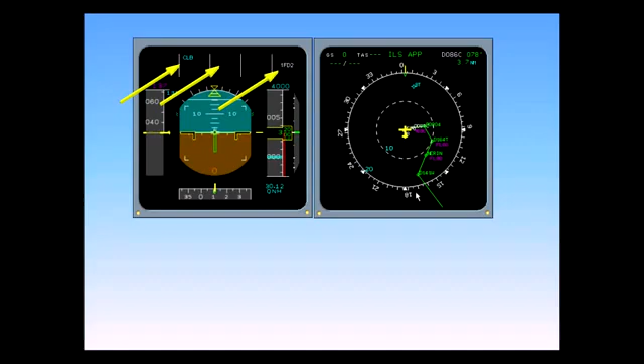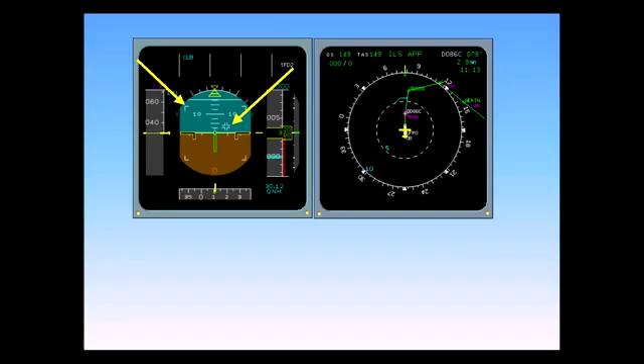Also notice the box corners toward the edges of the ADI and the Maltese cross in the center. These symbols appear after engine start and are used during the flight control check. The cross is the side stick command indicator, what the stick is commanding in pitch or roll. The box corners are stick command limits. The center of the cross should not exceed these limits when performing the flight control check.

The ground roll guidance command bar also appears after engine start, when either TOGA or FLEX is selected, provided there is an operating localizer on the takeoff runway selected in the MCDU. It replaces the FD vertical bar and is used during takeoff and rollout for assistance during low visibility. All of these symbols disappear after takeoff.

When the thrust levers are placed into the flex or toga detent, the FMAs indicate manual flex 49, meaning that the thrust has been manually placed into the flex detent, and that thrust for the assumed temperature of 49 degrees Celsius has been calculated and set.

Speed select 197 in blue, meaning that a speed other than the default econ speed has been selected.

A/THR illuminates in blue, meaning that the auto thrust system is automatically armed. It will engage automatically when thrust is reduced to climb.

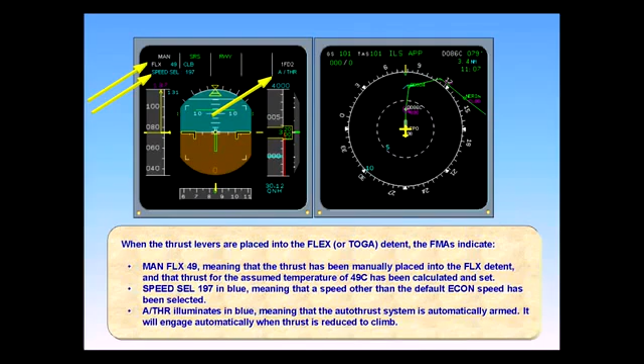The FMA also shows SRS as the vertical engaged mode. SRS, Speed Reference System, commands the horizontal flight director bar to a pitch angle resulting in a speed of V2 plus 10 knots. Should an engine fail, SRS will command a speed of V2 or existing aircraft speed, whichever is higher.

RWY, meaning runway track, is the engaged lateral mode. Runway track is selected by simply turning the heading knob one click in either direction while the aircraft is on the ground. The heading knob must not be pushed or pulled. Runway track can be used up to 400 feet AGL to ensure obstacle clearance during initial climb in case of engine failure.

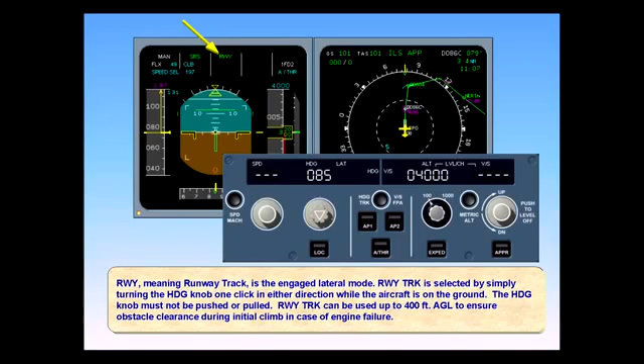At 30 feet, runway turns to runway track. This mode provides lateral guidance on the extended runway centerline based on the track memorized during the takeoff roll.

The autopilot may be turned on at 100 feet AGL, provided SRS has engaged. If it has not, the autopilot may not be used until 500 feet AGL.

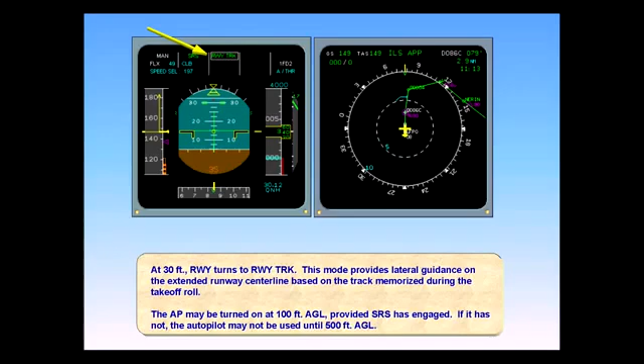At 400 feet AGL, the aircraft must be put into the heading mode. This is accomplished by pulling the heading knob on the flight control unit.

At the UAL thrust reduction acceleration altitude of 800 feet AGL, a white flashing message, lever climb, appears in the auto thrust FMA. The FMA flashes as a reminder to set the thrust levers to the climb detent. Set the thrust levers to climb.

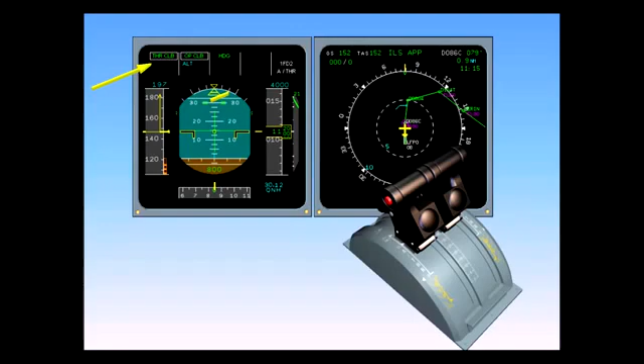Thrust climb illuminates in green in the auto thrust FMA column, and auto thrust turns white in the engaged status column. The auto throttles have automatically engaged. The system is in the thrust mode and commands max climb thrust.

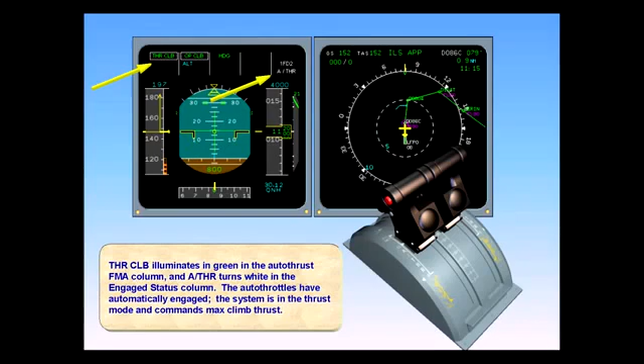Also at 800 feet, SRS has disengaged and the vertical mode now becomes open climb. Since we had changed the Econ climb speed to green dot, the FMGC treats this speed as a selected speed. The magenta triangle indicating managed speed disappears and is replaced by the blue selected speed indications. Since 197 knots is off the speed scale, a blue number appears on top of the speed tape. Also, ALT is displayed in blue, indicating that the altitude capture mode is armed.

The aircraft now begins to accelerate to green dot speed. 60% of the power is used to increase speed and 40% to maintain climb. Flaps and slats are retracted on schedule. Note, the selected speed number has disappeared and has been replaced by the blue triangle.

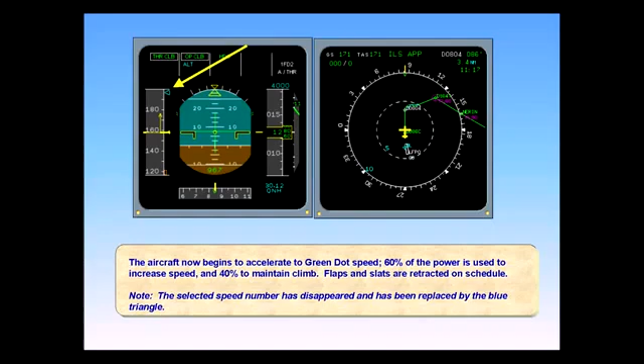At 3,000 feet AGL, the aircraft is returned to the managed speed mode by pushing in on the speed knob. Push in on the speed knob.

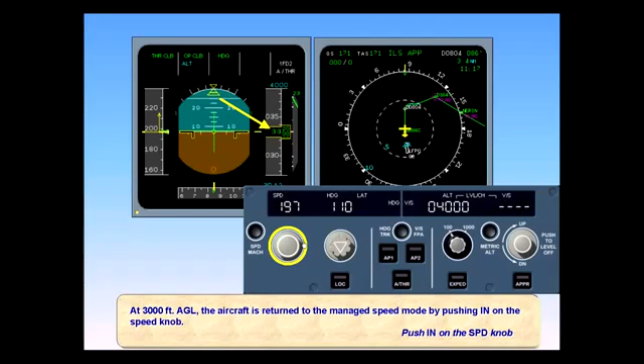The aircraft is now in the managed speed mode. Managed speed indications appear on the speed tape. Since 250 knots is above the speed tape range, the indication is shown by a magenta number above the speed tape. Also note that the flight control unit's speed window has closed, the numbers being replaced with dashes, and the managed speed light is on.

The following illustration, while not yet part of United's operating procedure, is an illustration of the capabilities of the A320. While there are plans to incorporate procedures like these into the manual, at the present time the most restrictive altitude must always be set on the flight control unit.

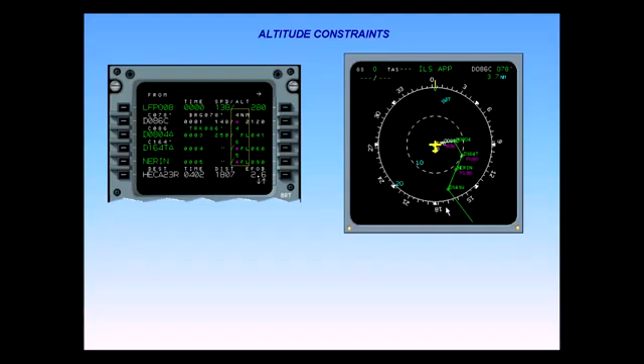The flight plan contains a SID which was loaded into the FMGC during initial setup. The SID has an altitude restriction of 8,000 feet, as indicated by the magenta dot on the MCDU.

Pressing the Constraint button on the EFIS control panel will display the restriction on the ND, whether it be a speed, altitude, or time restriction. Press the CSTR, Constraint button.

The Constraint button illuminates green, and the altitude constraint of 8,000 feet, which already is shown on the MCDU, is now visible on the ND.

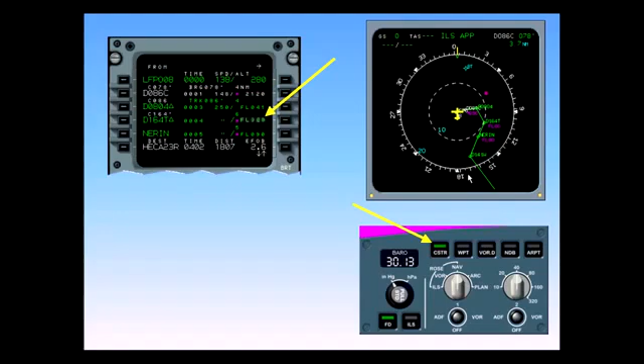We are airborne and level at 4,000 feet. ATC clears us to flight level 230, with the restriction to cross the intersection at or below 8,000 feet.

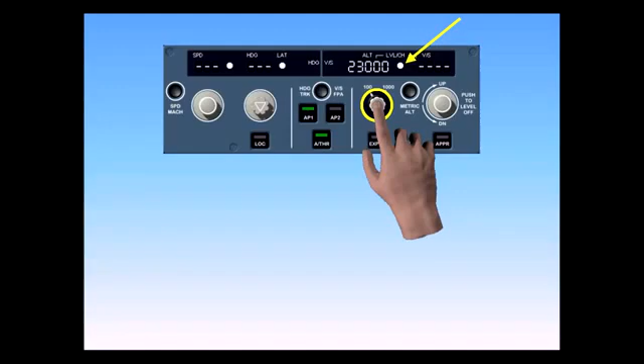First, we dial in the cleared altitude of flight level 230. Then we command a VNAV climb by pushing in on the altitude knob. The level change light illuminates, indicating that the FMGC is in vertical nav, or VNAV.

On the PFD, the primary indication that VNAV is engaged is climb, CLB, annunciated in green in the vertical column.

The FMGS has predicted that it will reach the VNAV constraint altitude of 8,000 feet before reaching the intersection. This is indicated by the magenta level point arrow. On the PFD, the ALT in magenta on the FMA and the target altitude 8,000 in magenta on the altitude scale indicate that the FMGC will level off and capture this restrictive altitude constraint.

The aircraft is now approaching the altitude constraint. The altitude constraint mode automatically engages as indicated by the FMA. On the altimeter, the magenta target altitude indicator is moving downward.

The aircraft is now level at the constraint altitude, with altitude constraint in green on the FMA. VNAV is still armed, as shown by the blue climb on the FMA. It will automatically re-engage when the aircraft flies over the constraint waypoint. The re-engagement point is marked by the blue start of climb arrow on the ND.

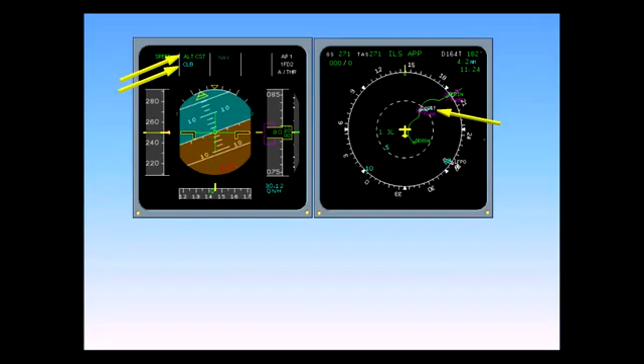You now receive a clearance to cross NERIN intersection at flight level 230. Then climb to and maintain flight level 350.

After entering the constraint into the FMGC, the system predicts reaching flight level 230 before crossing the waypoint, as indicated by the magenta level arrow. The system automatically reverts to the thrust climb mode, and the new constraint becomes the target, ALT and 23,000 in magenta.

ATC now clears you to maintain a heading of 200. Pull the heading knob to engage the heading mode.

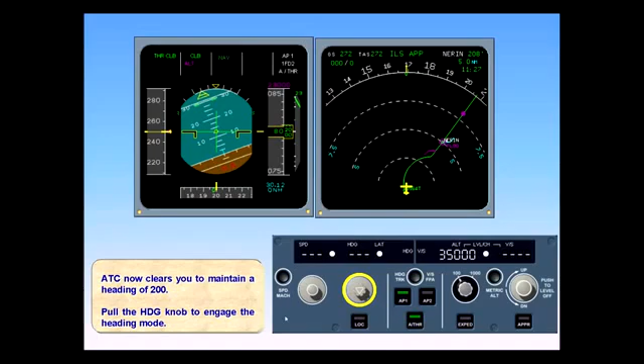On the FMAs, climb is replaced by open climb, and the magenta altitude has been replaced by blue altitude in the vertical column, and heading has replaced nav in the lateral column.

On the ND, the solid green line now indicates the aircraft track line, and the dotted green line is now the FMGS flight plan.

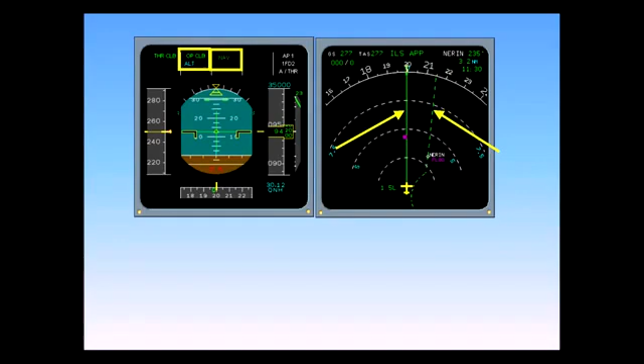On the FCU, the LAT indicator light extinguishes, the window opens, dashes disappear, and the present aircraft heading appears in the window.

When the heading mode was engaged, VNAV automatically disengaged and the FMGC automatically reverted to open climb mode. ALT magenta reverted to ALT blue, and the magenta 23,000 changed to blue 35,000. Altitude capture is now armed to the FCU set altitude, not the lower constraint altitude.

When not on the assigned route, the altitude constraints which are assigned to flight plan waypoints must be disregarded. The cardinal rule to remember is LNAV must be engaged for VNAV to operate.

You have now been cleared to a heading of 180 to intercept course and resume normal navigation. Since the intercept point is on this side of the waypoint, the aircraft will smoothly intercept. Rearm LNAV.

Nav is now armed on the lateral FMA, blue. On the FCU, a white dot in the heading window indicates that Managed Nav is armed.

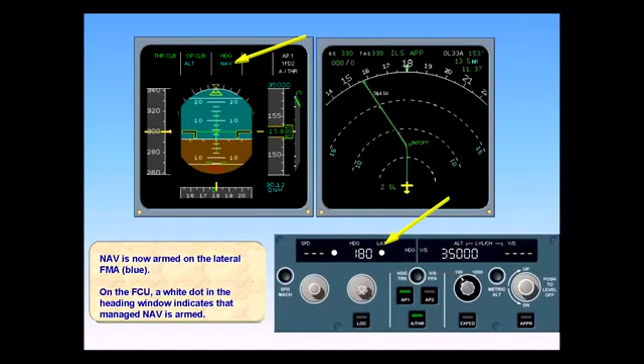On the ND, the solid green line indicates the track line to the computed intercept point, and then the remainder of the flight plan. If the intercept segment is missing, then the track line is crossing the flight plan beyond the waypoint, and interception is not possible without further action.

When the aircraft closes with the intercept point, the nav mode automatically engages, as seen by the indications on the FCU and on the FMA. VNAV is available again, but since there are no more constraints, it is not necessary to re-engage it. Climb and open climb will now perform the same function.

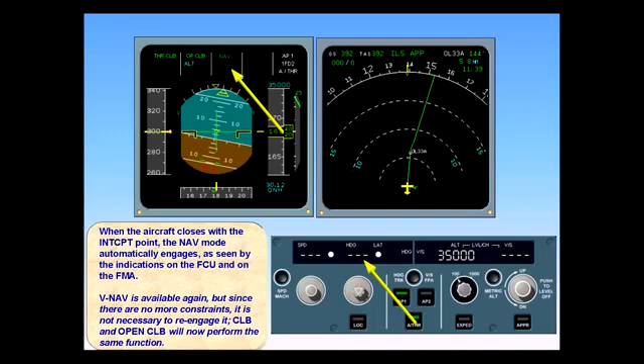Passing through the transition altitude, a yellow flashing STD message appears below the altimeter. The FMGC does not know 29.92 as anything but a QNH barometric setting. Therefore, the barometric set knob on the EFIS control panel must be pulled to set standard, STD.

Pull the baro set knob. The symbol STD now displaces the baro setting. The altitude annunciation on top of the altimeter is changed to a flight level reading. Lastly, the window in the EFIS control panel now reads STD.

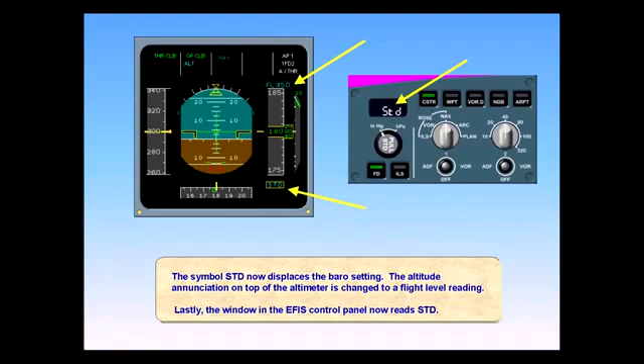You are re-cleared to flight level 290, and now ATC advises that 290 is your final. Since it cannot take radio calls, the FMGS assumes that you will continue the climb to flight level 350 and is therefore still in the climb phase, as shown on the MCDU performance page.

You have to change the cruise level on the MCDU progress page. Select the progress page. Changing the cruise flight level on this page will allow the system to go into the cruise phase. The cruise Mach will be adjusted to its optimum value, which will minimize fuel consumption.

The new flight level is already typed into the scratch pad. Insert the new flight level. The vertical mode has changed to altitude cruise, and the MCDU page has changed to cruise, indicating that the Autoflight system is now in cruise mode.

The aircraft has now reached the point of descent. ATC has cleared you to flight level 270. Since it is a 2,000-foot step down, you decide to descend slowly, selecting minus 1,500 feet per minute on the FCU vertical speed and pulling the knob. Auto thrust is in speed or Mach mode. The autopilot is controlled by a selected vertical speed.

In this instance, the selected vertical speed has priority over the auto thrust speed mode. This means that if too high a vertical speed is selected, the autopilot will pitch the aircraft down to track the vertical speed target. Even though the autothrust will command idle, the airspeed can increase significantly, even into the overspeed range.

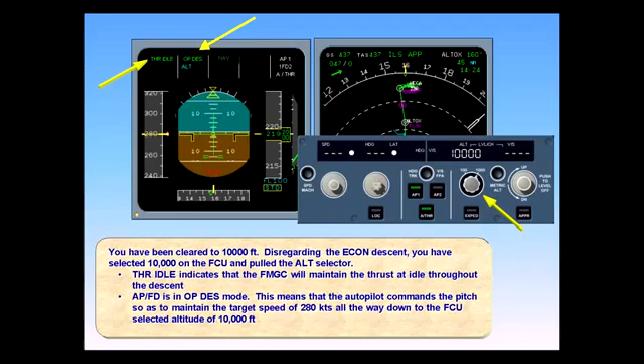As the aircraft reaches the target altitude, the speed mode automatically engages on auto thrust. Alt-star automatically engages in the vertical mode. Alt-star is the capturing mode, smoothly rounding out the level off. As soon as the aircraft is level, altitude will engage.

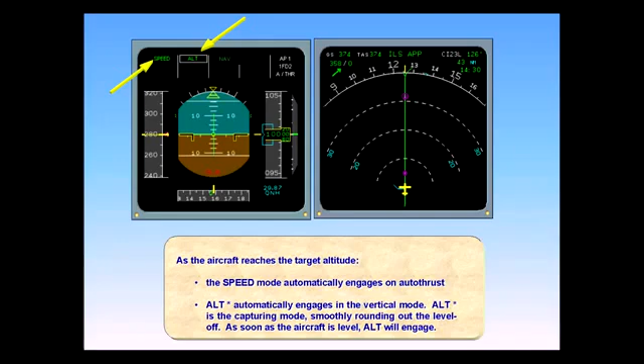We have descended to 2,000 feet and are still in the nav mode with managed speed engaged. To prepare for the approach, we need to put the system into the approach phase of flight. This is accomplished by selecting the performance key on the MCDU. It automatically displays the active phase of flight, descent. Note the prompt at line select key 6 left, activate approach phase.

Activation gives us automatic speed control if speed is in the managed mode: green dot if clean, S speed if flaps 1, F speed if flaps 2 or 3, and V approach if flaps are full. If you are still some distance from the airport and wish to activate, the use of selected speed is recommended to prevent being 40 miles out at green dot.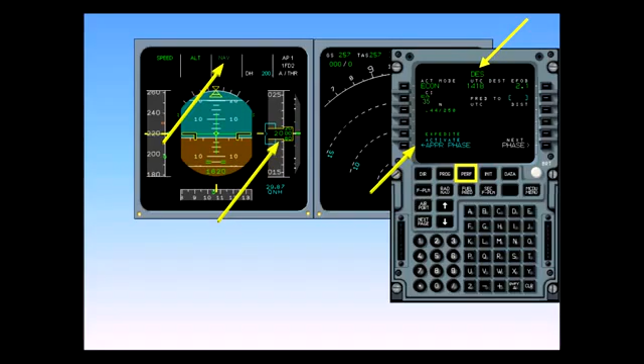Note the deceleration point on the ND. The aircraft should already be in the approach phase and should have been slowed and configured for the airport traffic pattern. If it is not, activation will automatically occur when crossing the deceleration point below 7,200 feet AGL in a managed nav mode.

If the aircraft overflies the deceleration point with managed speed engaged, the aircraft will automatically begin slowing to a speed appropriate to the aircraft configuration. Even if you are in selected speed, the approach phase will automatically activate. However, the aircraft will not slow, since a selected speed will override a managed speed.

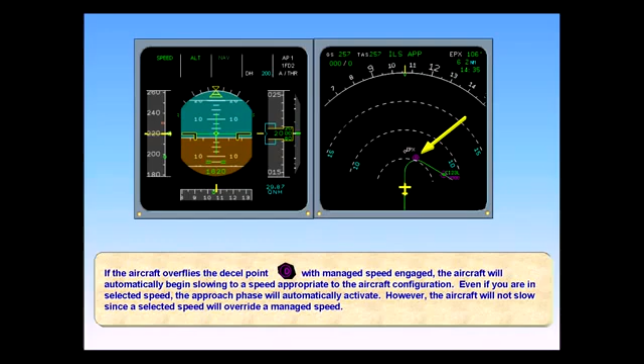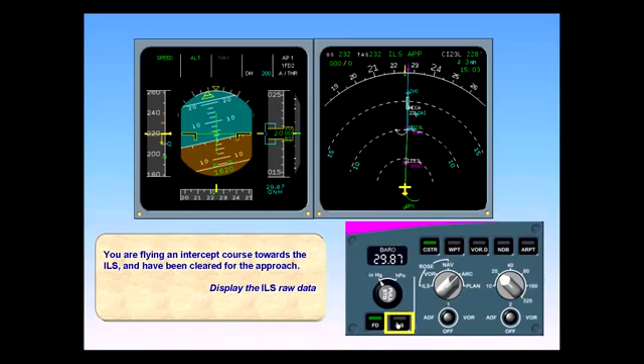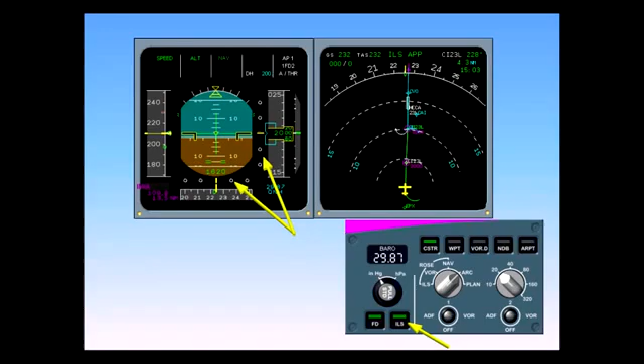You are flying an intercept course toward the ILS and have been cleared for the approach. Display the ILS raw data. The ILS switch illuminates green and the raw data ILS scales are displayed on the PFD. On the FMA, a decision height of 200 feet has previously been inserted into the MCDU performance page.

Now press the approach button to arm the approach modes, localizer and glide slope. Press the approach button. The approach button illuminates green. On the FMA, the localizer and glide slope are armed, blue. When you press the approach button, the localizer glide slope modes become armed because you have inserted an ILS approach into the flight plan.

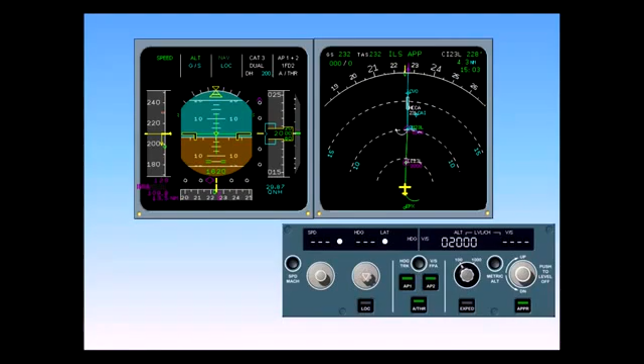To accomplish an auto-land, at least one autopilot must be engaged. For complete redundancy, the second autopilot should be engaged. Auto-land requirements will be discussed later in your training. Engage Autopilot 2. Both Autopilot 1 and Autopilot 2 are now on, and the approach capability is Cat 3 Dual. This ensures the highest possible redundancy level, and thus the lowest possible approach minima.

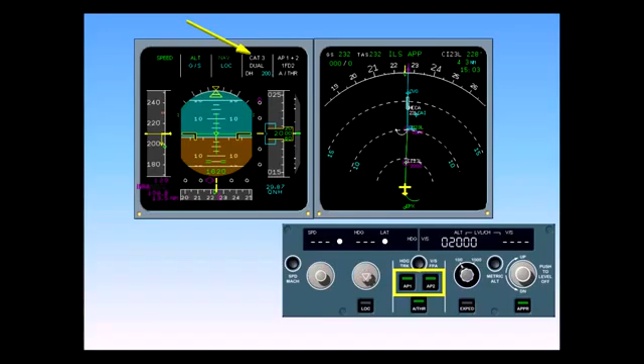The aircraft is now at green dot. Once the aircraft is 10 knots below VFE next, the amber dashes at 230 knots, the flaps can be selected to 1, and the aircraft will decelerate toward S speed. On the PFD, you can notice that the loc deviation symbol is centered, meaning that the aircraft is established on the localizer. Loc capture is indicated in green on the FMA.

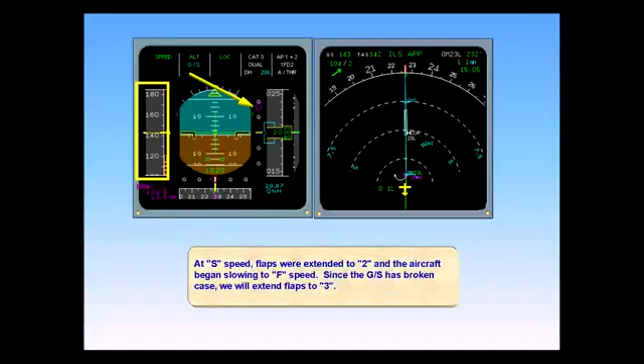At S speed, flaps were extended to 2, and the aircraft began slowing to F speed. Since the glide slope has broken, we will extend flaps to 3. The glide slope was captured at 2,000 feet with flaps 3 extended. We have successfully set the gear down, flaps full, go-around altitude on the FCU, 2,500 feet.

During the approach, as the aircraft crosses 700 feet radio altitude, ILS tuning is frozen. At this point, an FMGS change or failure does not affect the approach completion. At about 400 feet RA, the land mode engages, and any action on the FCU is disregarded. Land can be disengaged only by landing or by engaging the go-around mode.

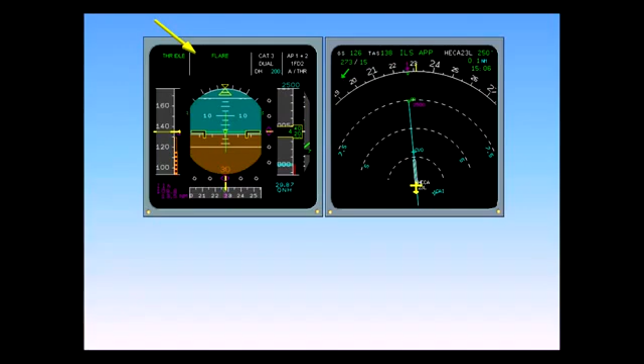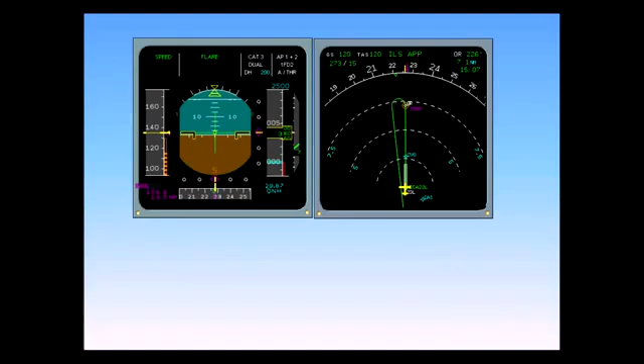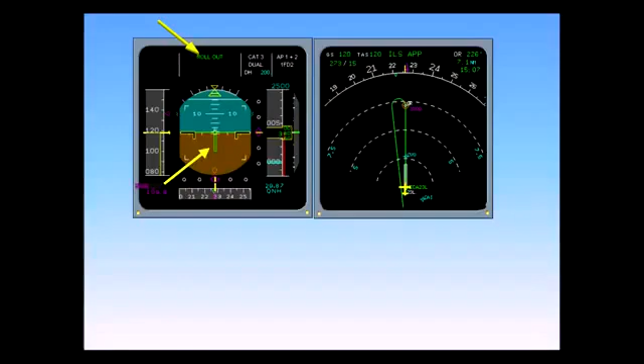At around 50 feet, the flare mode automatically engages. At around 30 feet, the auto-throttle reduces the thrust to idle. At around 10 feet, a retard auto callout reminds you to set the thrust levers to idle. At touchdown, the rollout mode automatically engages, and the ground roll command guidance bar is displayed on the PFD. The autopilot tracks the runway centerline using the localizer signal. Use reverse thrust and brakes as required. Switch autopilot off at low speed.